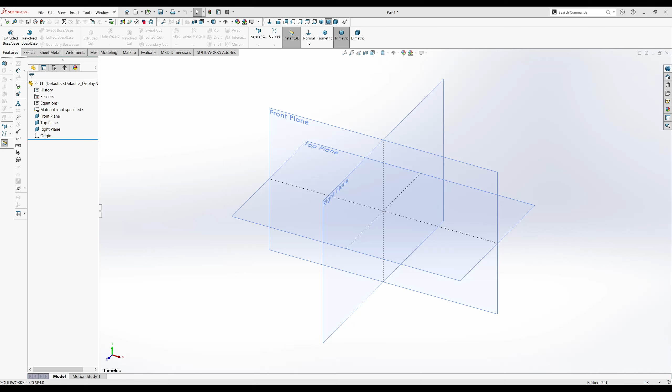Welcome back to another Solidworks tutorial. For this part, we'll be drawing the base plate drawing. That's what the drawing looks like and all the dimensions.

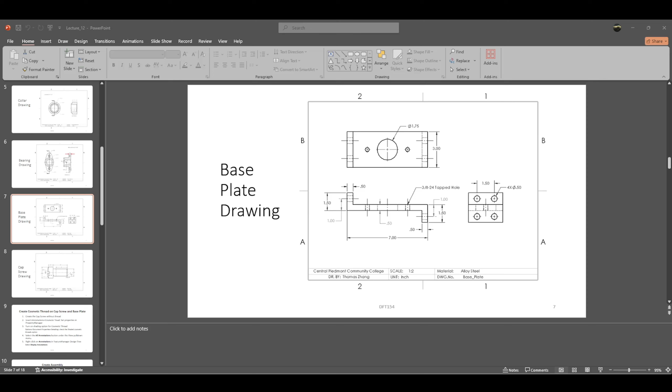We'll go ahead and get back into the model. So we just extrude that. We have to kind of try to sketch this L-shape thing. Let's kind of draw that.

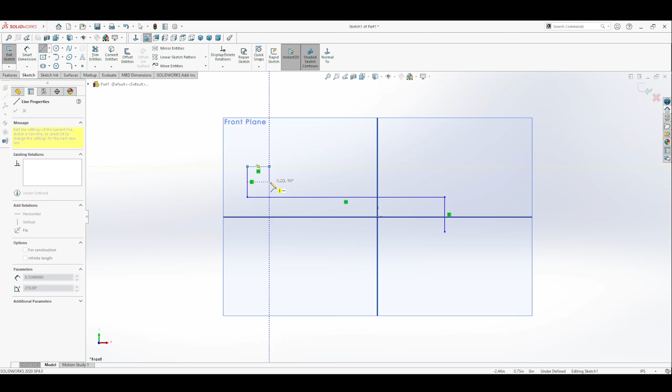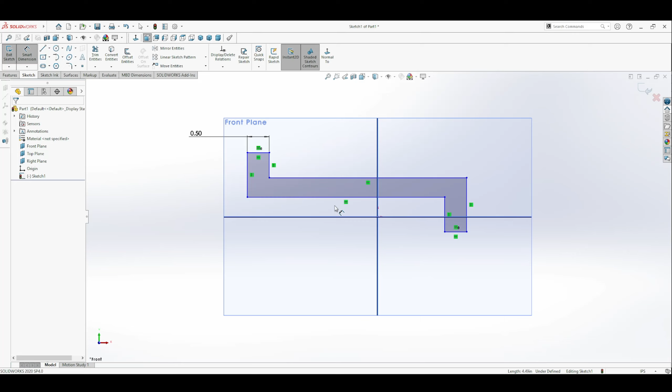So obviously it's not 100% yet. We have to add some dimensions. That's a half. And this should be equal to this. Dimension here is also a half. And overall length 7.

Let's just kind of add a relation and bring this to the center right here. Coincident. And what's missing? This height. Height is 1.5. And we just need to set this one and this one equal.

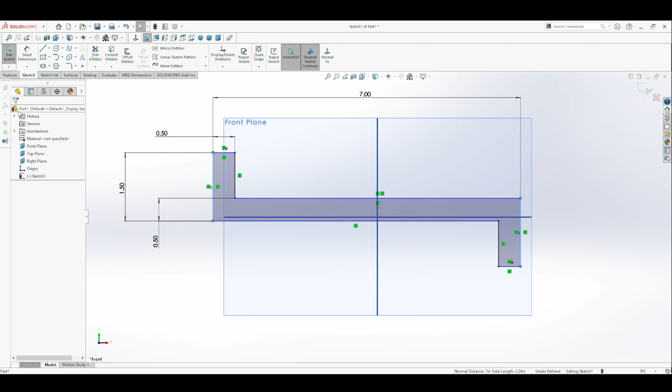Okay, and the placement of this, we can just snap that to this plane, collinear, and there, it's snapped. Make sure there's not any fillets or anything weird that we have to add in. No, I don't see anything. So let's sketch that.

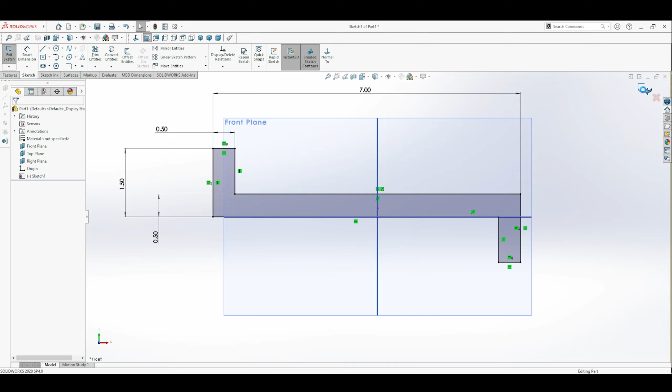Mid-plane. How wide is this? 3 inches wide. Hit the check, and there's the first step of your part.

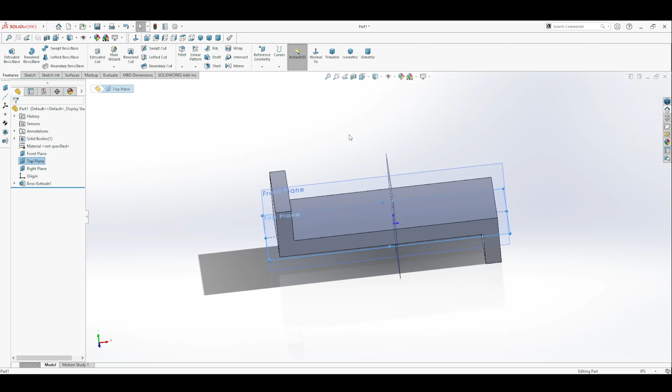And then we've got a whole bunch of holes drawn on this. These holes, let's start with the ones up here. Hole wizard, and those are 3/8 24 tapped holes.

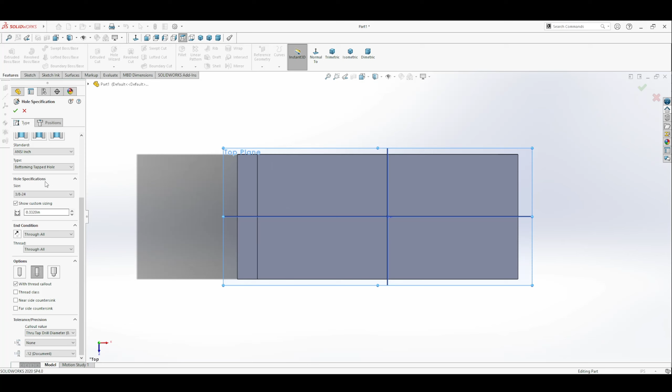There, you look around and you'll find straight tap, and reset the hole. And we set 3/8-24. So 3/8 24. It'll be cosmetic thread through all, right? Yes. And position, just go ahead and

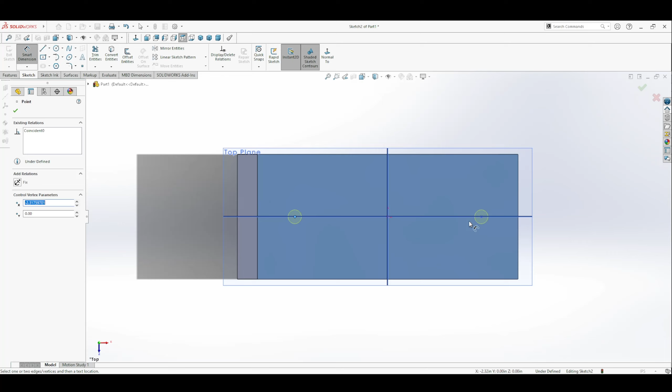Bring it over here and bring the other one over. And there's no center to center. How interesting is that? So we'll just eyeball it here again, and let's just say 2 inches, and that'll bring it equal.

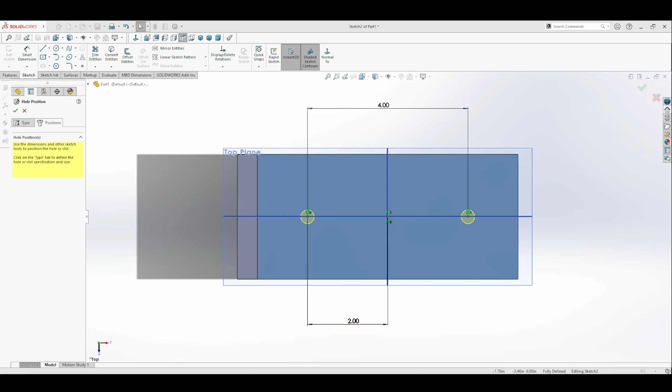Okay, and then just hit the check. So something I did to kind of get into some more advanced features here for this hole,

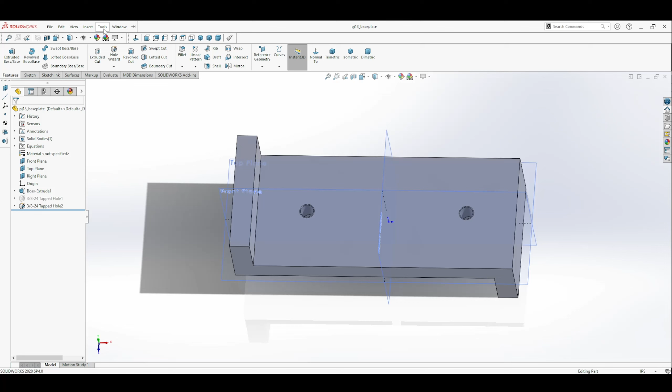I created a relationship using equations. So if you come up here to the top and you go to Tools, Equations, I created a global variable called hole C to C, and it was supposed to be 4 inches from center to center.

These two relationships down here, this is your first hole, and this is your halfway point dimension, and this is your center to center dimension shown in the hole positioning. So here we've got that overall dimension is the global variable hole C to C, and in the halfway I did hole C to C divided by 2, and that way you can modify this one global variable.

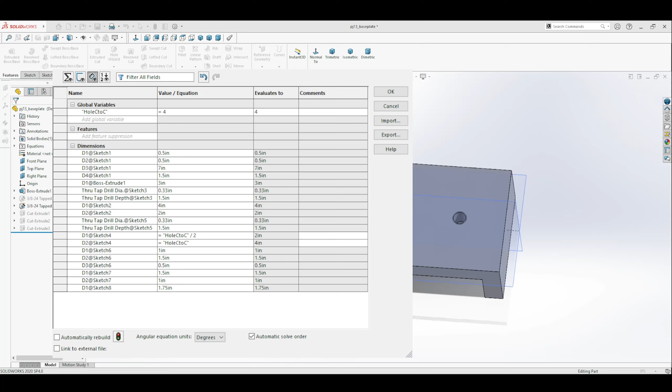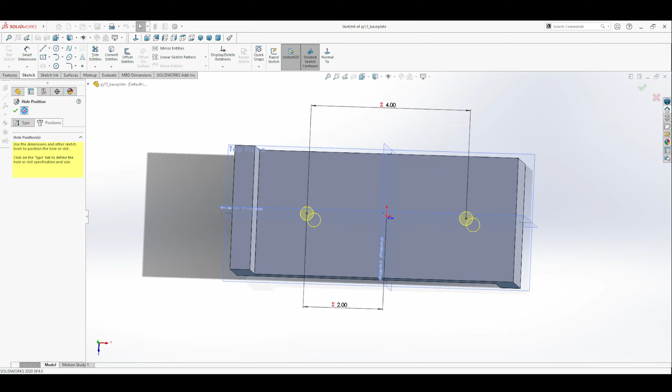So that was just one way to generate dimensions in the tool. So we'll go on to the next set of holes. We've got these holes that cut through the legs, and they don't really define if they're drilled holes or not drilled holes. So we could just do extruded cuts.

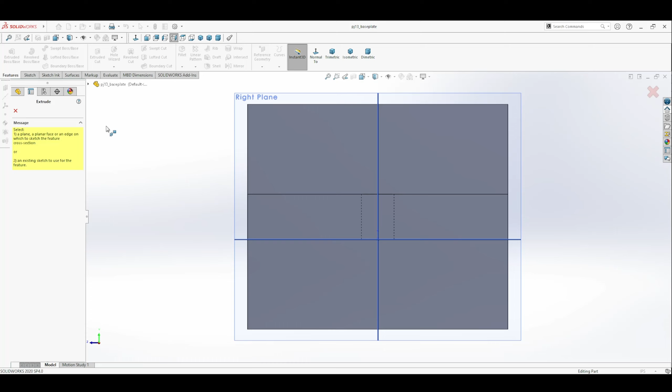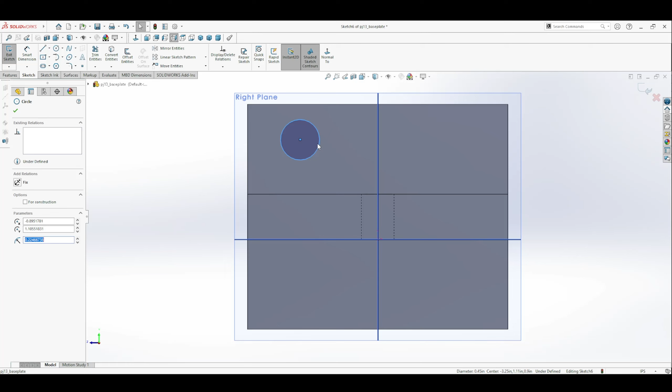It might be easier. And we'll do a circle and mirror that entity on this axis. Come on. Mirror it about this axis.

And set the two holes equal to each other. And we can set, here we have center to center, and this dimension from here to here is 1.

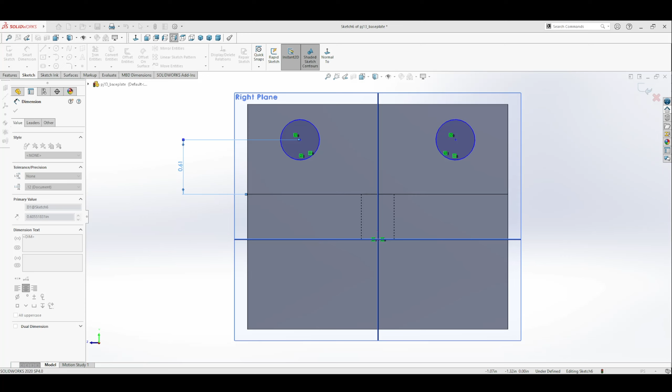That can't be right. It's not from there. It's from the bottom. So, come on, get out of the way. From here to the bottom is 1.

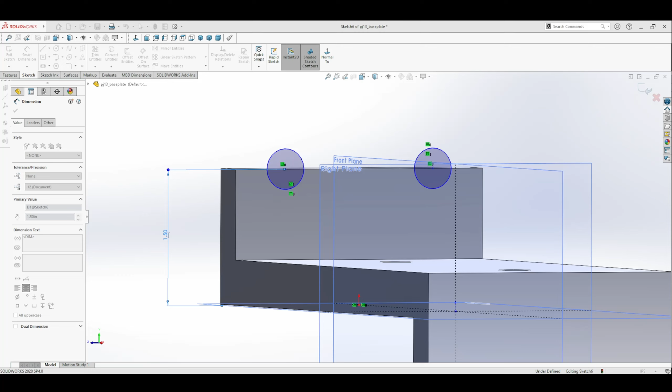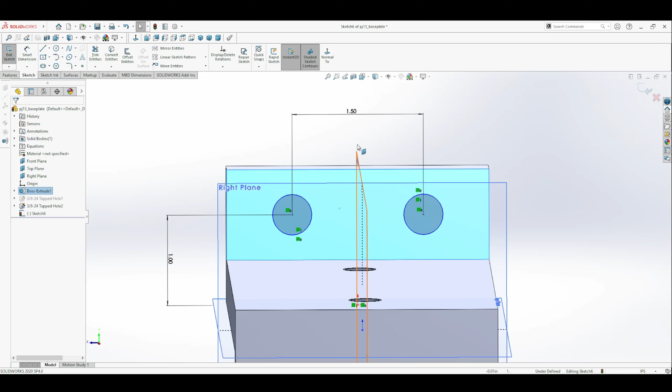And dimension from here to here is 1.5. And just make sure that, oh yeah, we forgot to set diameter. So these were supposed to be 1/2 inch.

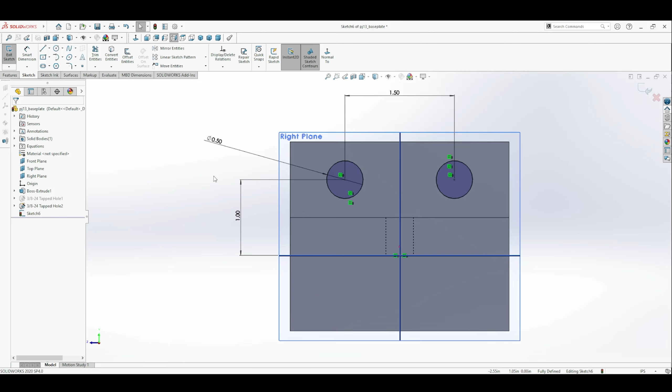And that's it, that locked. And hit the check. And this just needs to be up to next. And hit the check. There's your 2 sets of holes from that surface. You'll do it again down here.

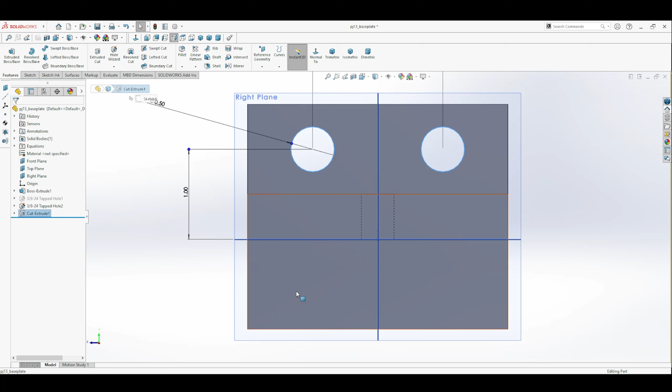Selecting that, we'll do extruded cut. There'll be another 2 holes. And you'll do exactly what you did up there. Mirror them about this axis. Set them equal to each other.

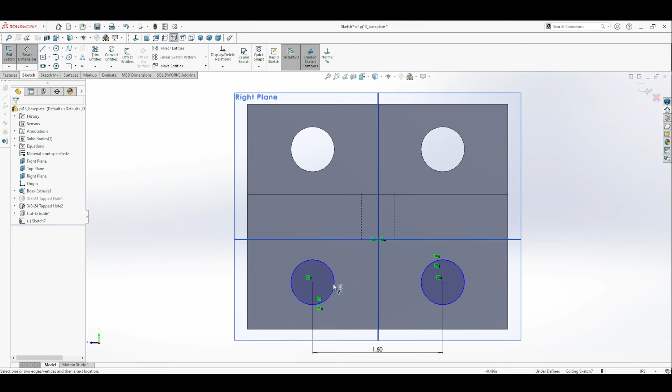And then center to center is 1.5. And the dimension from the center to the top, the center to the top. Come on, give me the dimension. There we go, it's 1.

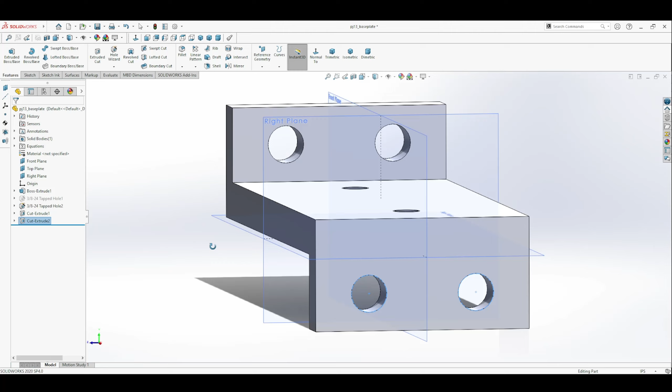And hit the check, up to next, and hit OK. And there's your through holes. And finally, we have an extruded hole up here.

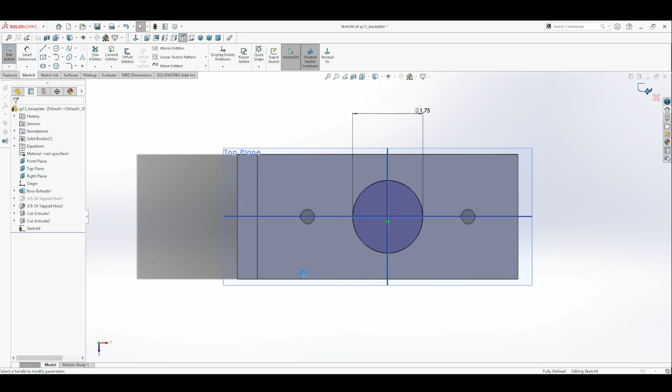We can draw that right on the center, and that's 1.75. And that's it for that hole. It'll be next, hit the check, and there's all the features. We'll just go through one more time, verify we have everything. So we can just save this, and we're ready to make the drawing.

Oh, real quick, let me check. Yes, alloy steel. Let's go ahead and add material. Edit material, say alloy steel, hit apply and close that.

Let's make sure our properties are entered in for creating the drawing. So we've got a description, we've got material, weight, unit measure, drawn by, and drawn date, and we said scale would be coming from the other.

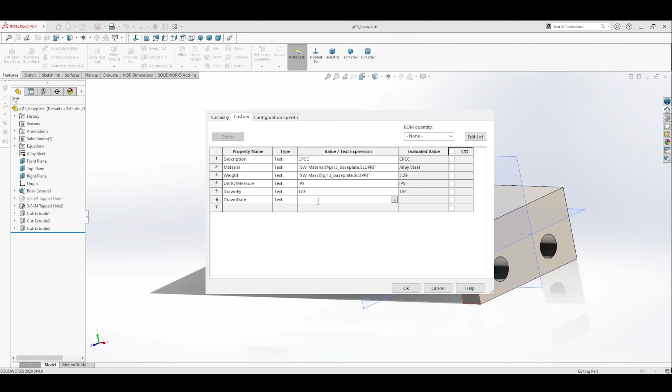Okay, so I believe I have everything: material, weight, mass, description, CPCC, units measure, drawn by, and drawn date. Hit OK, save that, and then now you can create your drawing using your template.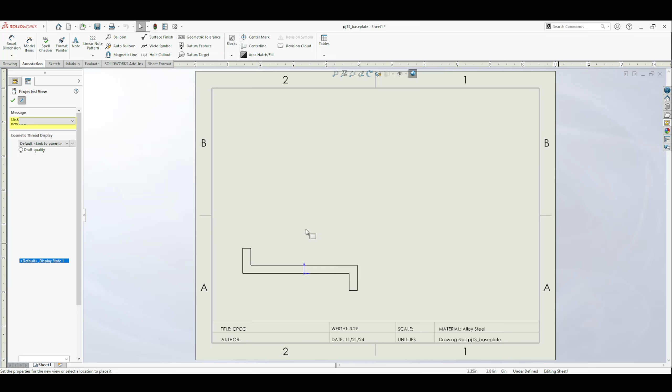And we've got a side view, a front view, and some other views. So let's see, front, there's a top, and then there's this view. You can show the projected, it doesn't hurt. And we'll start showing all the dimensions.

Let's try that again. Entire model. There we go. Okay, so if you click on model items and tell it the source is the entire model, it'll automatically populate all your dimensions in this view.

So we had 7 inches there. We had this 1/2 inch thickness here, and that leader should be horizontal. We have the 1/2 inch there, and this 1.5 here.

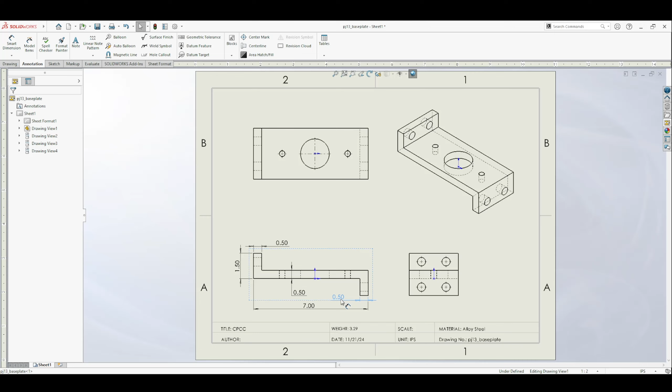Or any other things. I mean, it's kind of recursive at this point, but we can show it, that dimension. And we need to show all the holes. So that just needs to get out of the way.

How do we show, let's see, that one's center to center. Come on, give me the center. Here we go. And you just come in here and edit the dimension text and say 4 times. Hit the check. And our leader needs to be horizontal and pointed on the outside.

And there's also this reference dimension here.

So you can use the center line feature to give you the axis of the holes. That was not the center line that I meant to do. I need it for that one, that one, that one. I will do that up here as well. Just that one.

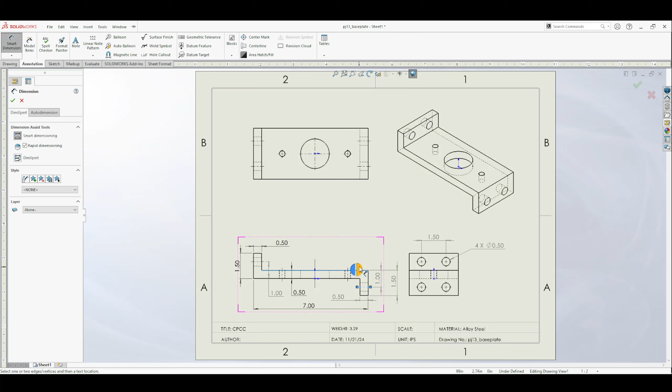Come on, center line, custom text. And just show the center to center dimension here. Actually, this view is quite cluttered now, so let's go to this view and do a center to center there. And we'll show the width here, and we'll show the diameter of this hole.

And let's see, what else are we missing? There needs to be a hole call out. So, oops, clicked on the wrong thing. Hole call out, and let's try to...

Okay, so you can't really do it on the dotted line, but if you actually select the hole itself, it'll give you the hole diameter and the thread. So we actually don't need the hole diameter. We just need it to tell us 2 times 3/8-24.

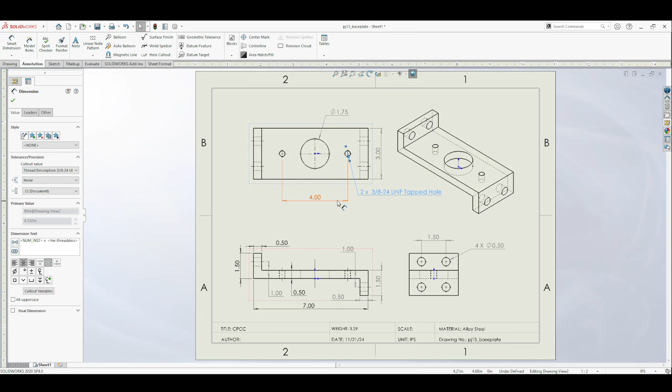And that's it. There's our call out for the holes and all the dimensions we were trying to show.

And finally, we just need to make sure that everything's populating. And I can see that it's not quite. So again, we'll just fill in pounds here. Make sure our property is linking. Drawn by.

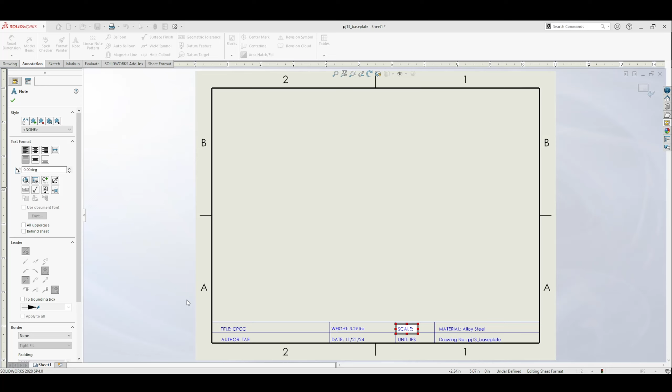Our scale is current document sheet scale. Hit OK, check. Make sure that our sheet scale was right, so 1 to 2. Hit the check. There's all the information we needed, and you're ready to go.

You can save this drawing and save all, save, and you're ready for the next step.